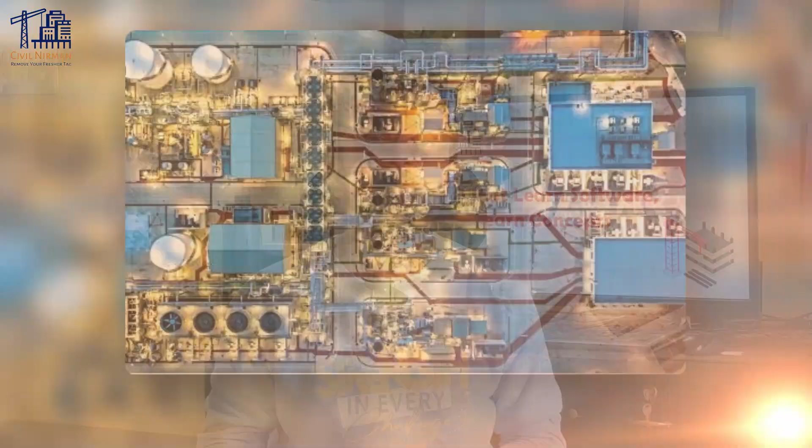Imagine you are about to design a massive factory or chemical plant. You have got the blueprint for every tank, beam and pipeline. But do you know what's underfoot? Topographic surveys are the detailed ground maps that tell us exactly that. They measure every hill, valley and feature on the site, so engineers can build safely and accurately. So in this video, we will cover why topo surveys are a must for structural engineers and site planning in industrial projects, how surveyors perform them, and what kind of data you get from them.

So let's first understand why topographic surveys are essential. When it comes to industrial plants, nothing leaves our engineers guessing about the site. A good topo survey gives us the lay of the land up front. Here is why they matter.

First, safety and risk mitigation. Topo data reveals hidden hazards on the site. For example, steep slopes or soft ground could threaten foundations or heavy machinery alignment. By showing ground instability or potential flood zones in advance, we can design around those issues and avoid accidents or structural failures.

Second, drainage and water management. Surveys map out the natural flow of water, creeks, swales and drains. With that information, engineers can plan stormwater systems correctly. This prevents flooding or erosion at an industrial plant, a crucial step when millions of gallons of water and chemicals may be involved.

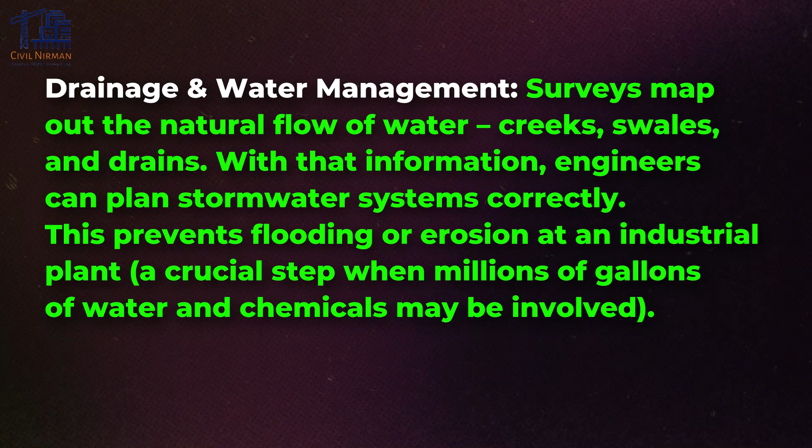Next, design efficiency and cost saving. Accurate elevation data lets us calculate exactly how much earth needs to be moved, that is cut and fill. That means no wasted digging or unexpected soil. We optimize the plant layout by knowing where to level ground or leave it as is. Precise surveys also help estimate material needs, so you are not ordering extra concrete or steel just in case.

Next, optimal layout and land use. Topography guides where we put buildings, tanks, roads and storage yards. For example, we can place heavy equipment or large tanks on naturally flat spots identified by the survey, and we avoid steep grades for vehicle routes. In short, surveys help us maximize usable land and make sure critical facilities sit on the best terrain available.

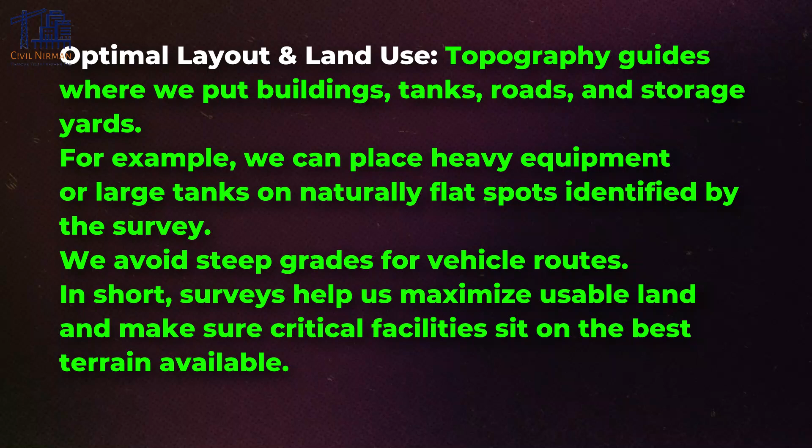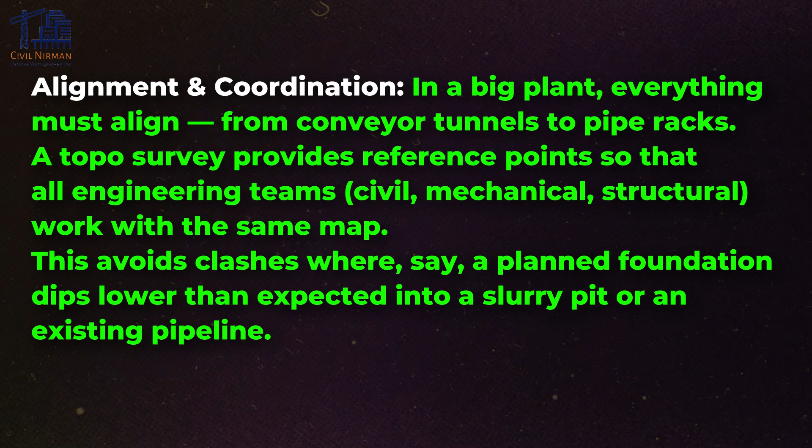Next, alignment and coordination. In a big plant, everything must align, from conveyor tunnels to pipe racks. A topo survey provides reference points so that all engineering teams, like civil, mechanical, electrical, instrument and process, work on the same map. This avoids clashes where, let's say, a planned foundation dips lower than expected into a slurry pit or an existing pipeline. In summary, a topo survey turns uncertainty into clear ground truth. It keeps your project safe, on schedule and on budget by catching problems before construction starts.

Now let's understand how these topographic surveys are performed. I'll guide you through a quick summary of these methods. So how do we actually collect this information? Surveyors use a mix of traditional instruments and high-tech tools, with the goal to capture a precise 3D model of the site. So let's first understand the traditional surveying method.

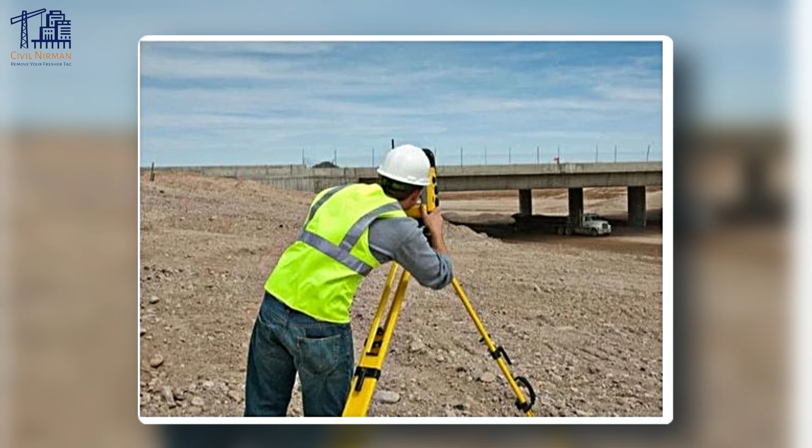First, the total station. A total station is like the modern theodolite with a laser. A surveyor sets it up on a tripod and aims at a reflector prism. It measures the horizontal and vertical angles and the distance to the point. Each shot gives us 3D coordinates, X, Y and Z, of a point on the ground or on a structure. By moving the instrument around and taking many shots, the crew builds up a cloud of points covering the site. Total stations are very accurate and great for detailed surveys around buildings, roads and equipment.

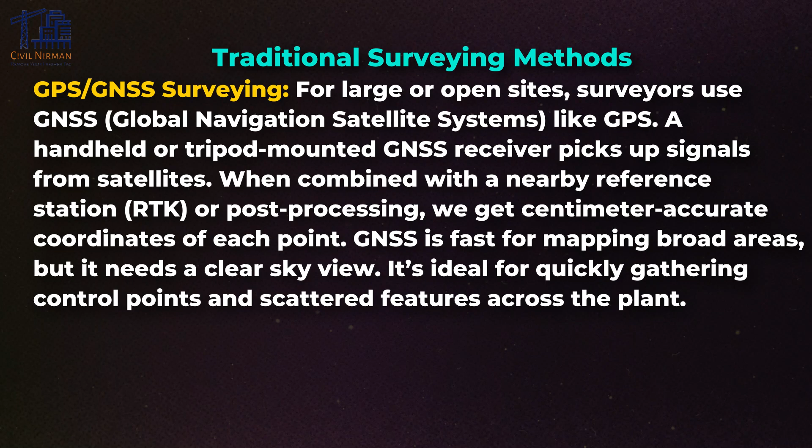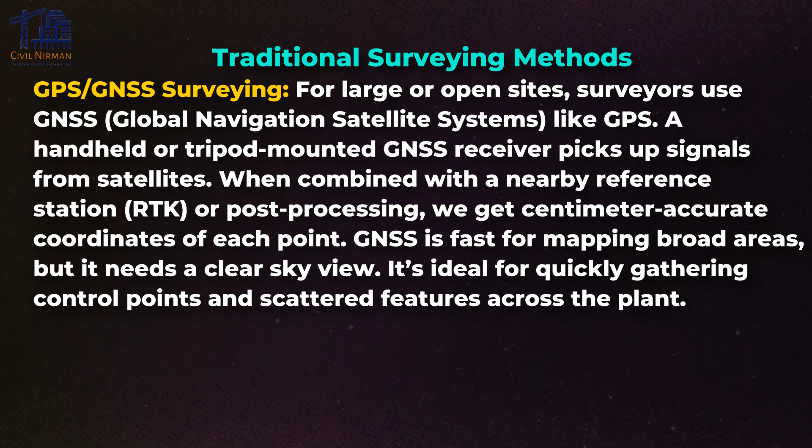Next is GPS or GNSS surveying. For large or open sites, surveyors use GNSS, that is Global Navigation Satellite System, like GPS. A handheld or tripod-mounted GNSS receiver picks up signals from satellites. When combined with a nearby reference station or post-processing, we get centimeter-accurate coordinates of each point. GNSS is fast for mapping broad areas, but it needs a clear sky view. It's ideal for quickly gathering control points and scattered features across the plant.

Next is leveling and total station.

Survey teams also set up local benchmarks or control points using leveling or laser levels to tie all measurements into the project's coordinate system. These control points ensure everyone, architect, engineers, contractors, is working from the same reference points.

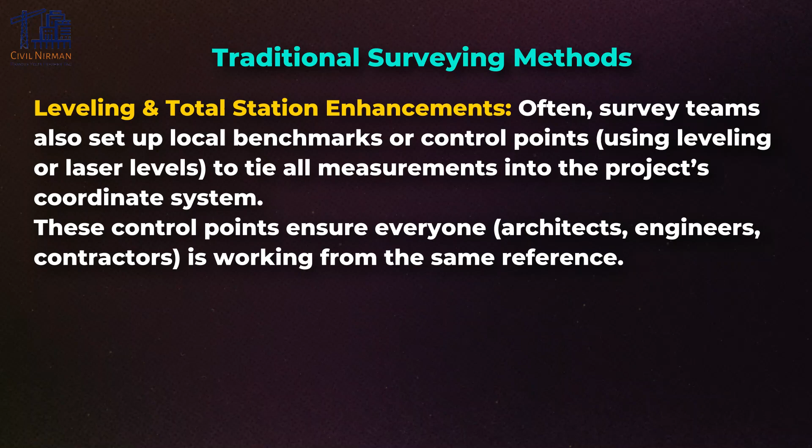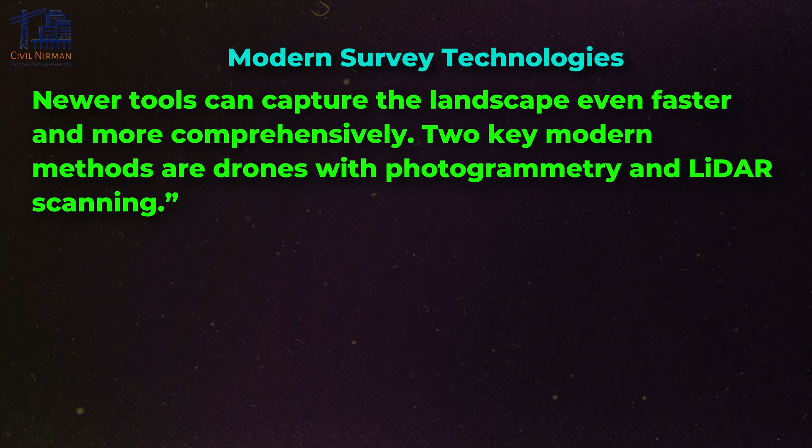Now let's understand what are modern survey technologies. Newer tools can capture the landscape even faster and more comprehensively. Two key modern methods are drones with photogrammetry and LiDAR scanning.

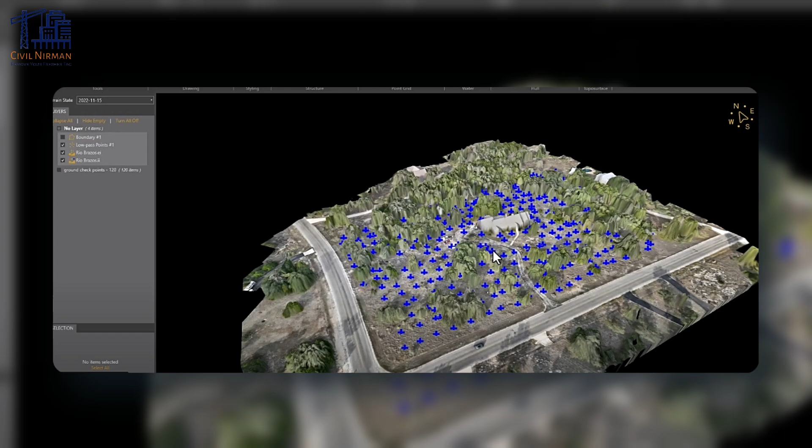In drone photogrammetry, drones equipped with high resolution cameras fly over the site along a pre-planned path, taking dozens or hundreds of overlapping photos from different angles. Special software like Pix4D or DroneDeploy stitches these images together into a 3D model. This process, called photogrammetry, finds common points in multiple photos and calculates their positions, resulting in an orthomosaic map and a digital elevation model of the entire area.

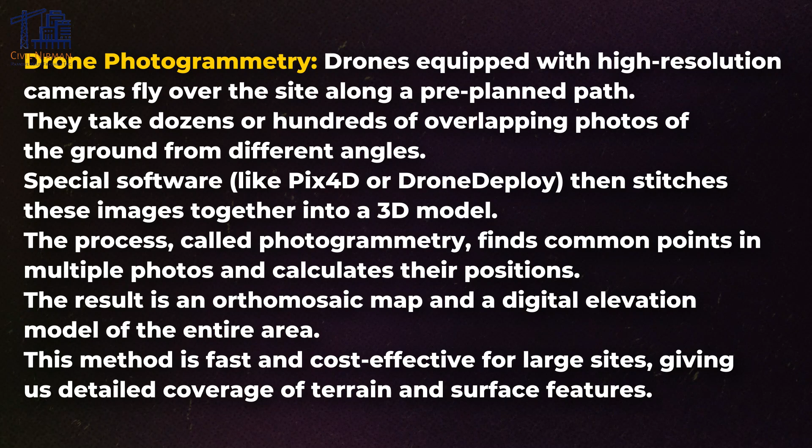This method is very fast and cost effective for large sites, giving detailed coverage of the terrain and surface features. Next is drone with LiDAR scanners, in-flight laser scanning.

Basically it uses lasers instead of photos. A drone, vehicle, or tripod mounted unit emits thousands of laser pulses per second towards the ground, and each pulse reflects off the terrain or objects and returns to the sensors. By measuring the time of flight, the equipment computes an extremely dense set of XYZ points. LiDAR excels in wooded or uneven areas because laser beams can penetrate gaps in vegetation and measure the bare earth and structures beneath.

The output is an ultra detailed 3D point cloud of the site. In many projects, surveyors combine methods, for example using GPS for control points, total station for critical edges, and drone for overall coverage. The end goal is always the same: produce a complete model of the site surface and features.

Now you might wonder, using all these methods, what data is collected in the topography survey? What exactly do you get from all this surveying? A topo survey documents every relevant site feature with spatial coordinates.

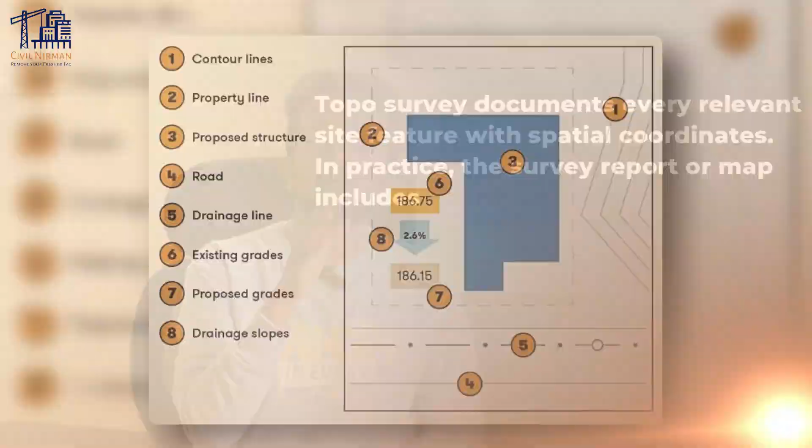In practice, the survey report or map includes a 3D point cloud representation of the site, and elevation points, a list of XYZ coordinates for ground points and key locations. This point data is often used to create a digital terrain model, essentially every measured spot from the pavement corners to the soil surface is captured here.

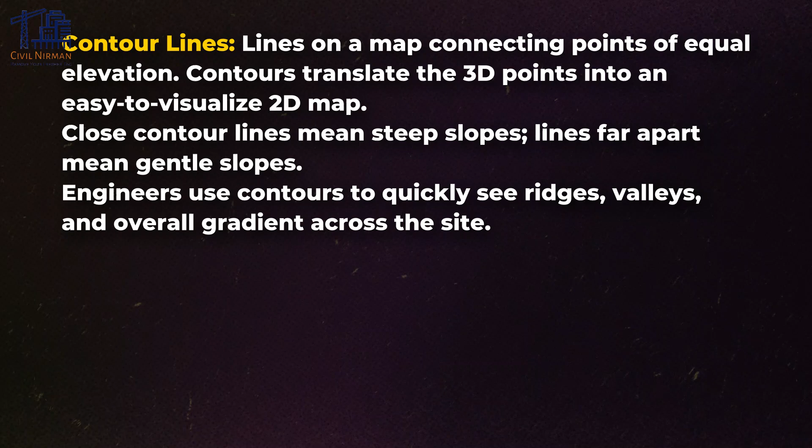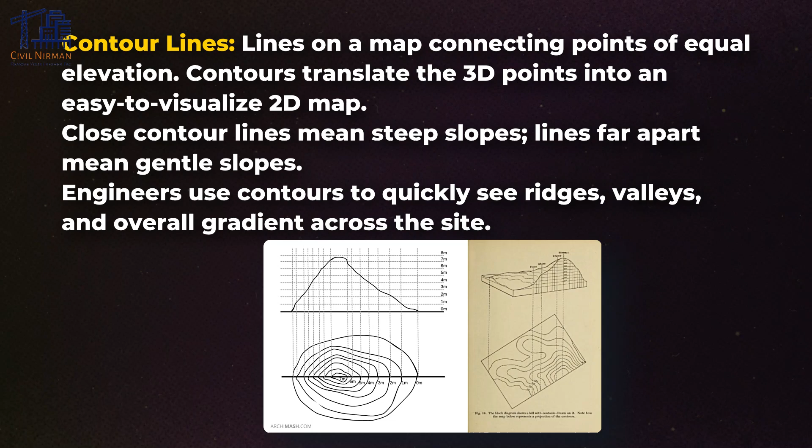Next they collect is contour lines, lines on a map connecting points of equal elevation. Contours translate the 3D points into an easy to visualize 2D map. Remember, close contour lines mean steep slopes, lines far apart mean gentle slopes. Engineers use these contours to quickly see ridges, valleys, and overall gradient across the site.

Man-made features: the survey shows all existing structures and installations on the site - buildings, storage tanks, pipes, curbs, fencing, utility poles, overhead cranes, road edges, and so on. For each feature, critical dimensions or edges are noted. For example, the footprint of a building or the line of a pipeline is drawn. This ensures that your design won't conflict with what's already there.

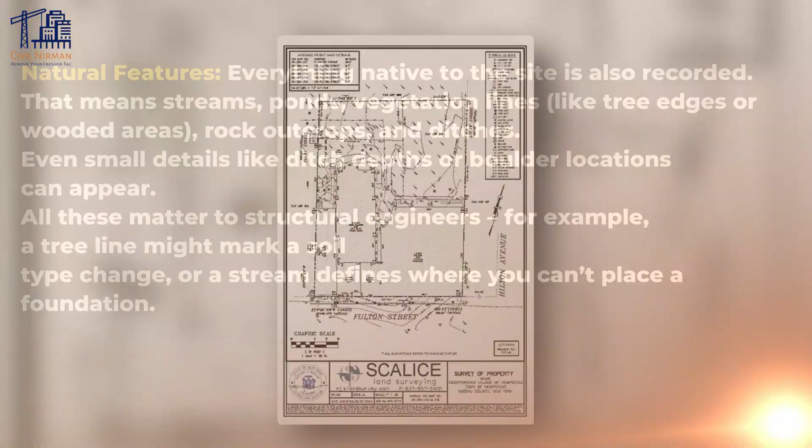Then natural features - everything native to the site is also recorded. That means streams, ponds, vegetation lines like tree edges or wooded areas, rock outcrops, and ditches. Even small details like ditch depths or boulder locations can appear. All these matter to structural engineers. For example, a tree line might mark a soil type change, or a stream defines where you can't place a foundation. Next, they collect property lines and benchmarks.

A topo map includes the legal boundaries of the property and any survey control points established. This ties the survey to real world coordinates, which are latitude and longitude or local grids. Knowing the property limits is crucial, so your plan stays within its site.

With this data, engineers overlay their designs right onto the site model. For example, by placing the building plan over the contour map, you can instantly see if a foundation slab ends up on a slope. If you have to run a pipeline, the manhole locations show up against the terrain. Essentially, topographical data gives you the reality check canvas for all the structural planning.

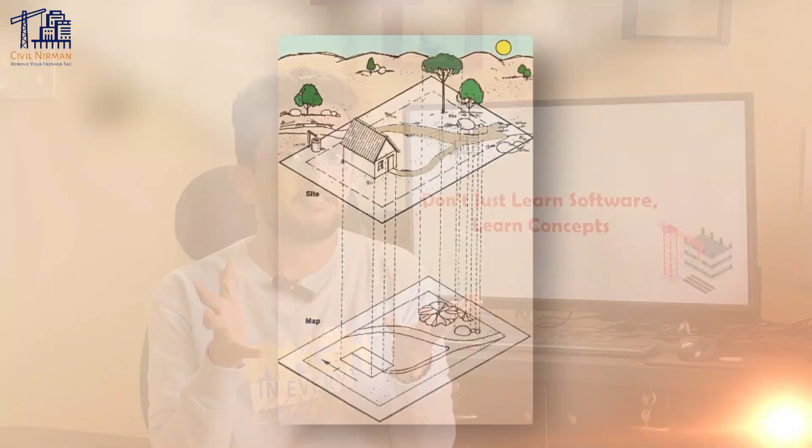So, in conclusion, topographic surveys are literally the groundwork for any industrial plant project. They turn the unknown ground into a known map. By accurately measuring elevations and features, topo surveys ensure that structural engineers start with real data, avoiding surprises, reducing rework, and saving money.

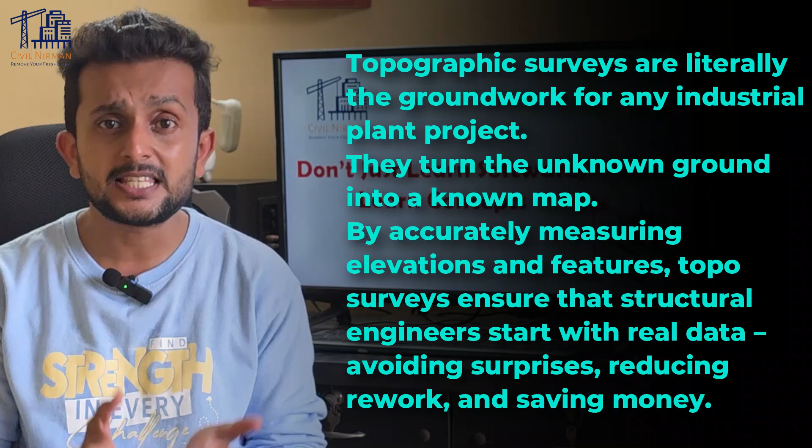So from the total station to the drones and LiDAR, surveying technology gives us detailed terrain models that inform every decision - foundation depths, drainage design, equipment placement, and more. In the end, knowing the exact topography keeps your plant design on a solid footing, both figuratively and literally.